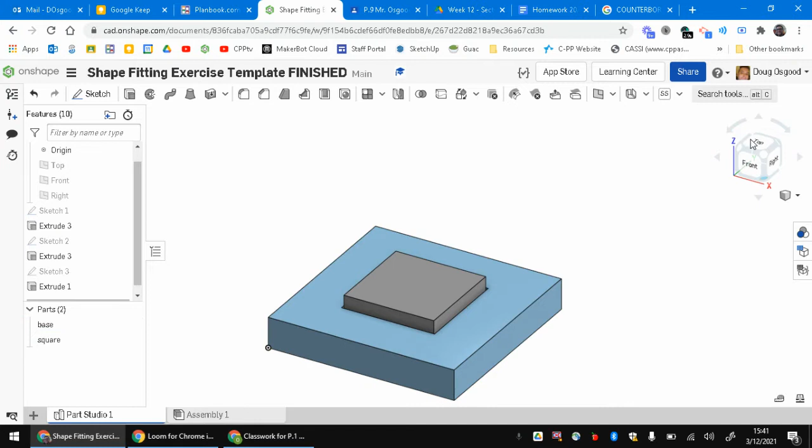If we look closely, there's a bit of a gap along the side. I'm showing this because a lot of you will have different reasons that you might need to create something like this where something fits into something else. We've talked about it a lot on paper, but I wanted to give you the opportunity to play around.

Refresh your Onshape skills while accomplishing that task. In the assignment, yours will look a little different, but you should have a link like this, and the video will be here as well. If you click on this link, it should open up to Onshape.

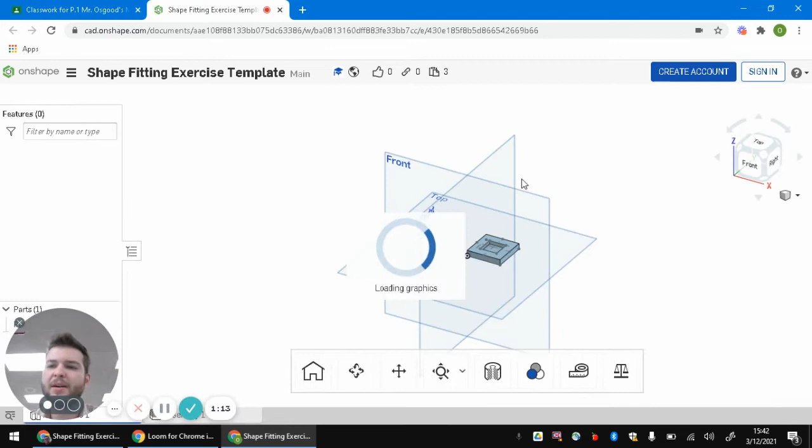Just like in my case, I'm not signed in yet, so it's not going to let you make a copy of it. So you'll have to go up here. If you're signed in, you may have a copy button right now, but if not, go up here and say sign in. Hopefully your email address and password will automatically fill. If not, you may have to remember what they are and type them in. We did this before with the key tags. You may have to remember your password or forget your password. I'm going to hit sign in, using the Osgood student account here.

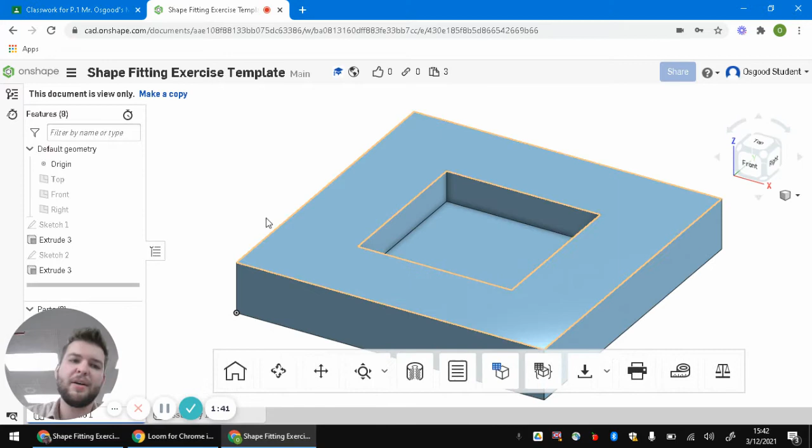Now you still can't edit this because we need to make a copy, so we had to log in first. Now it says I'm logged in up here, with my name showing. That's the name of the account. I'm going to click make a copy.

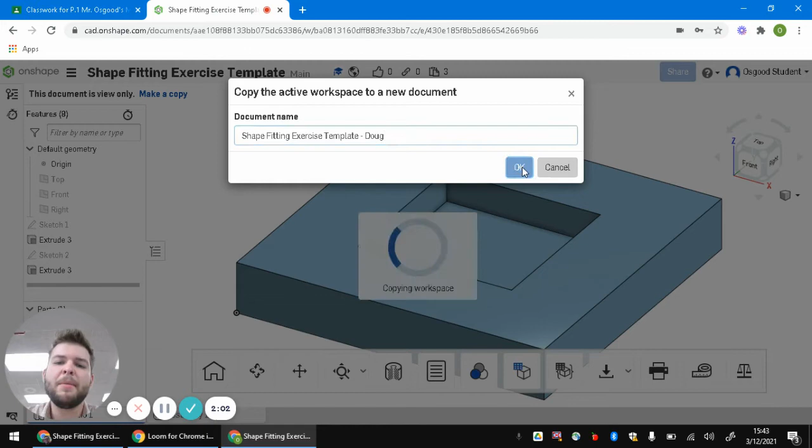Then you could put your name after this, so maybe I'll put Osgood, Doug, that's my first name. You could put your first name or something like that. But when you say okay, it's just going to make a copy of this document that you are then going to be able to edit. That is our goal, to give you this version you can edit.

If you remember zooming in and out in Onshape, if you have a mouse, you can scroll with the scroll wheel, or you can do a 2-finger swipe to scroll in and out with your trackpad on a Chromebook. This is what we are going to work with here. I'll also remind you that you can use the arrow keys on the keyboard to rotate, or we call it orbit the view.

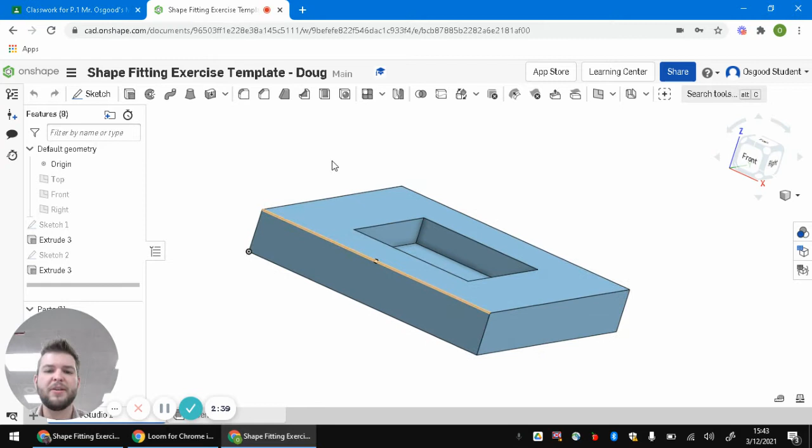If you hold Control and Shift and do the arrow keys, it will pan, which means it'll slide the view left, right, up, down, etc. Finally, if you need to reset, you can click on this little gray rectangle and just pick the first option, and it'll reset your view to a nice view.

So in order to create this shape inside here, if you remember from the key tag activity, to create anything in Onshape, just like we see over here, you have to start with a sketch, then you extrude it. That's how I created the block. You do another sketch, which in this case was the opening, and then you do an extrude, and in this case I did a remove.

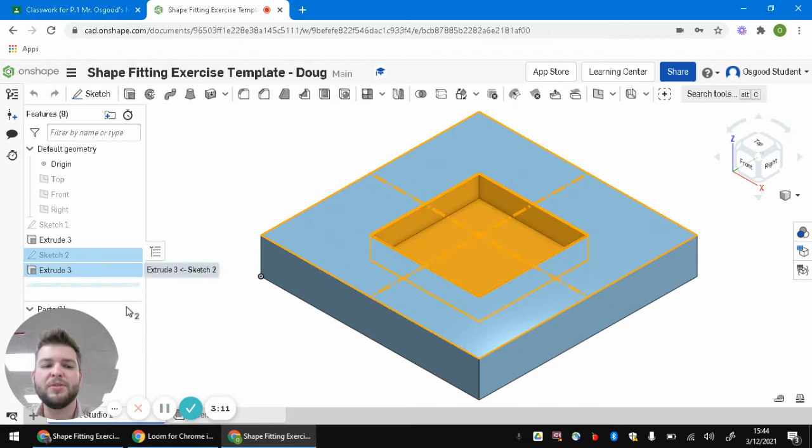So for us, we're going to have to create yet another sketch at the bottom of this pocket - that's what it's called when you have something scooped out and there's like a pocket. We're going to create a sketch in the bottom of this, and then we're going to extrude it upward.

So the first step is to create a sketch. I'll click the Create Sketch button. It says Select a Sketch Plane. Well, the plane or flat surface we'll sketch on is right in the bottom of this pocket. So I just clicked down there, inside there.

That was one click. And then what we're going to use is the offset tool, which should be right here. If you have a smaller screen and can't find this little symbol with the blue lines inside of it, you can always go over here and search for offset.

If you're not seeing any of these tools or this dialog, it may mean that you didn't actually create the sketch. That happens to people sometimes, so make sure you actually selected a plane and everything.

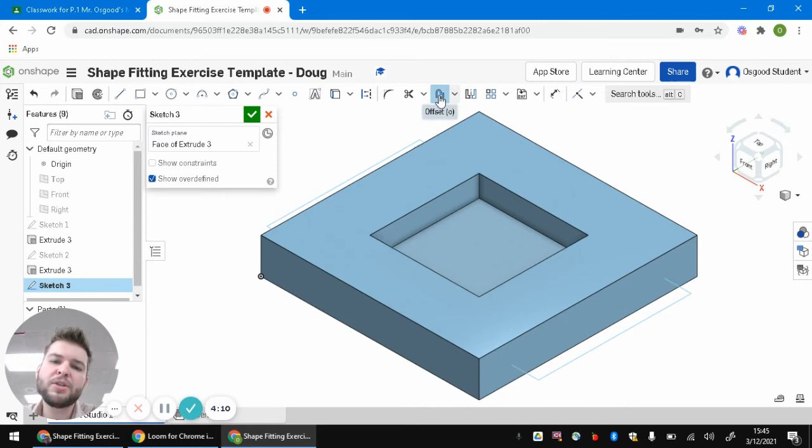So I turned on my offset tool, and now I'm going to pick all 4 edges of the inside here. You might say, oh, I can't get that one - that's where we use the arrows on the keyboard to orbit the view so we can see those lines. I'm hovering with the mouse till it lights up, then clicking to select it, and it becomes a darker orange.

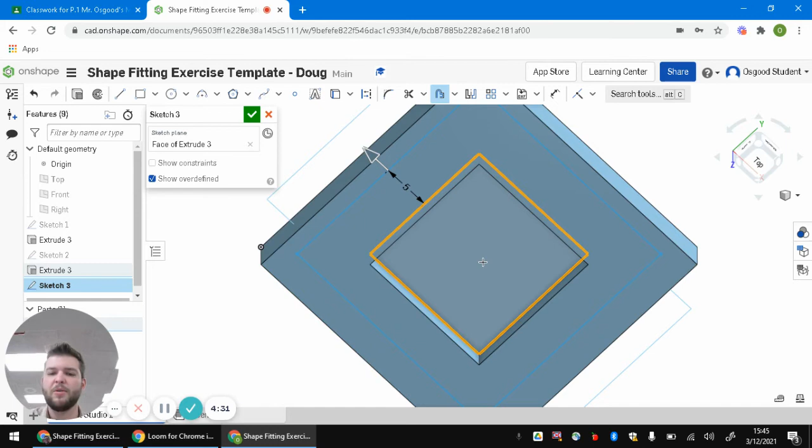We can tilt the view back here. This blue line on the outside shows the offset version of the lines you just picked that will be created. But we don't want it going outwards, so I'm going to drag this arrow back until it's going in the inward direction. Then I want to change this number here.

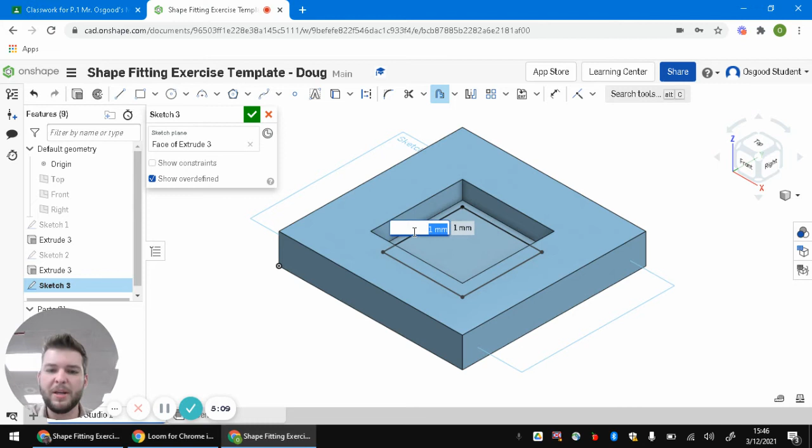I can change that by just clicking anywhere else, in some white space over there. That works, and now I get to type in the number, which is the distance away from the original lines I picked that I want the new lines to appear. In this case, we can just do about a quarter of a millimeter, so I'll do 0.25.

What that's going to do is, if I look at the top view by clicking on the top of the cube, leave about 0.25 on this side, which means there's also 0.25 on that side. So our total wiggle room is about 0.5 millimeters, which is a nice amount to make sure this will slide in and out without scraping.

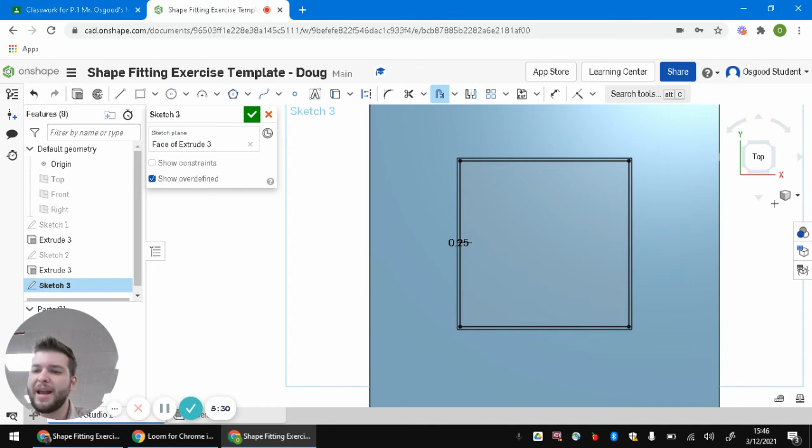Now that that's all set, I'm going to click this gray cube and go to the first option to reset my view. I'm going to accept my sketch with the green check mark.

And like I said, the last step is just to extrude. So if I pick the extrude option here, and hover around until just the inside square I just made lights up, and click once, it's going to start extruding that.

Now we have to change some options before we accept this. The big thing we have to change is right now we are adding material, which you'll notice is about the same color as the underneath part, meaning it would turn this into one big chunk of material. And that's not what we want - we want 2 parts, not just one.

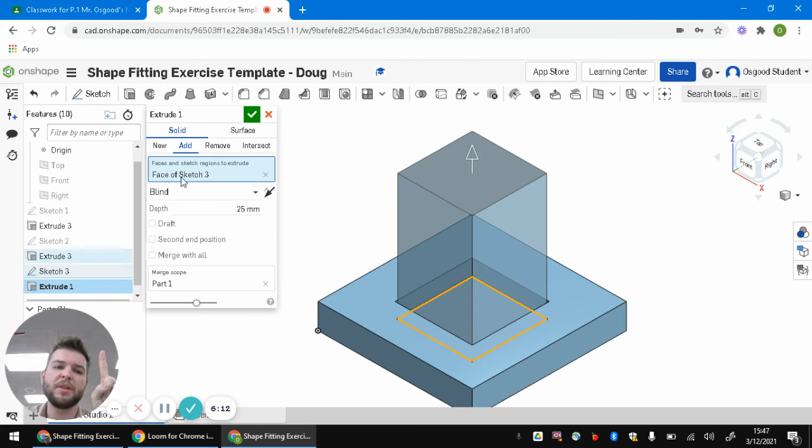So instead of adding, we're going to pick new. And now you see this change color, it got a little darker. This is creating a new piece using that sketch we just picked, that we just created by offsetting the original outside of the pocket.

Finally, let's change the depth. I'll tell you guys the height of this is 5 millimeters, and the floor, if you will, of the pocket is about 3 millimeters. So we're just going to do 5 millimeters for the depth of the actual extrusion.

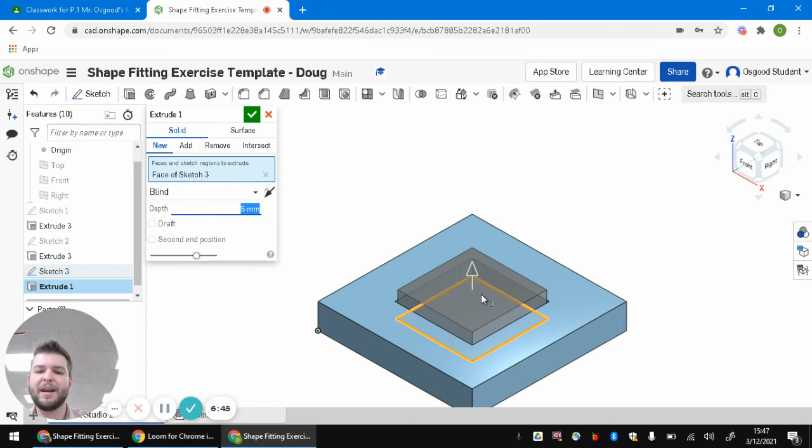If I hit enter, we'll see that update. So it's going to stick up a little bit out of there because it's raised up from the bottom of the actual base. Then I'll click the check mark.

Now what we see, I'm going to move this out of the way, is we see 2 parts over here. To stay organized, we can right click on one of these and pick rename. To right click, if you're on a Chromebook, it's a 2-finger click or a 2-finger tap on the trackpad.

I'm going to call this the square because the square is lit up, it looks like. I think that was right... I hope that was right. Uh-oh, I did it wrong. I'm going to hit undo - I just hit Control-Z on the keyboard, or you can hit undo up there.

I meant to rename this one base, because when I click on it, the base lights up. So I'll rename that base, enter, and then click off in space to unselect everything. Then we'll click on part 2, which is the square. I'll right click, rename, square, boom.

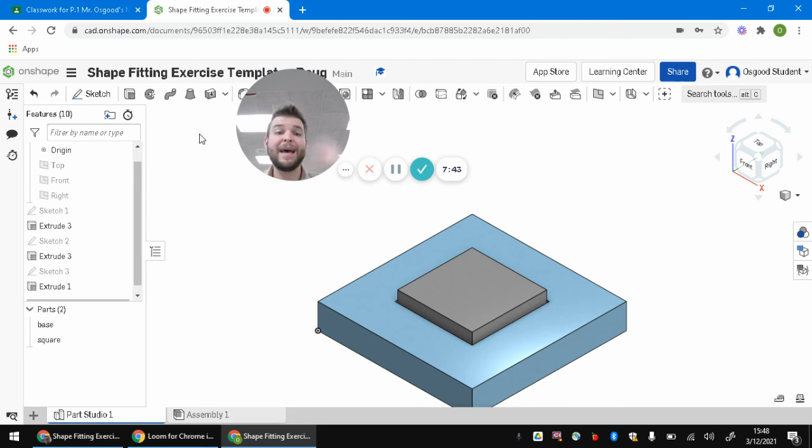And that finishes up how to create this shape in here. So the last step is to just create a screenshot, upload it to that assignment right there. If you need help creating a screenshot, just ask, or you can Google how to create a screenshot on a Chromebook and it'll come up really quick.

So this should be the instructions on how to do the shape fitting activity. I hope this helps people. Good luck on this, and let me know if you have questions.